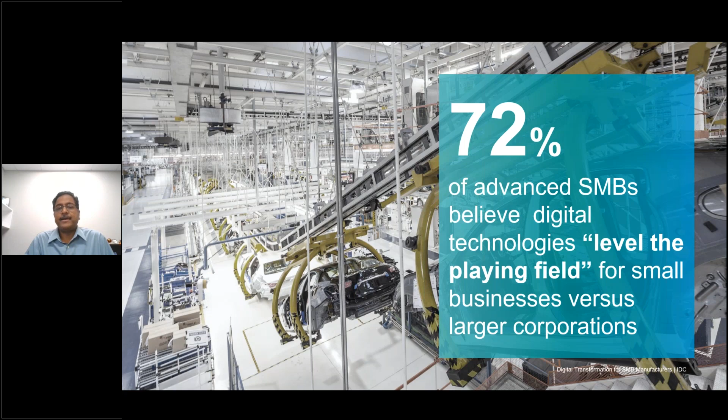But what does digital transformation really mean for small and mid-sized businesses, which the Saratech team addresses in a key manner? Industry analyst IDC recently did a survey where the focus was SMB manufacturing and digital transformation in particular. They surveyed hundreds of SMBs around the world, asking them about digital transformation, their strategies, plans, and recent progress. Importantly, 72% of advanced SMBs surveyed believe that digital transformation helps level the playing field for small businesses versus their larger competitors. So clearly, digital transformation is a key part of the go-forward strategy for many SMBs.

Second, the survey asked about technology priorities. Cloud computing and software as a service, or SaaS as it's called, really stood out. Nearly a third of SMB manufacturers surveyed said they were prioritizing cloud computing or software as a service solutions. And nearly half said that these categories would be a technology priority in the next 12 months. IDC notes that the cloud is a great enabler for collaboration and analytics. I think that's a great way to put it, because it's not about the cloud itself, but what you gain from it, and collaboration is the key.

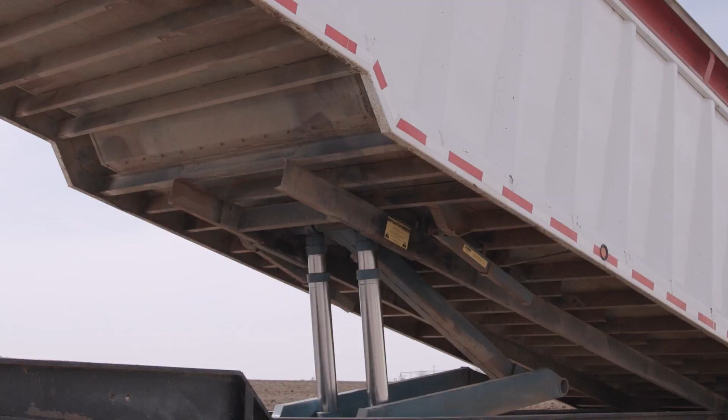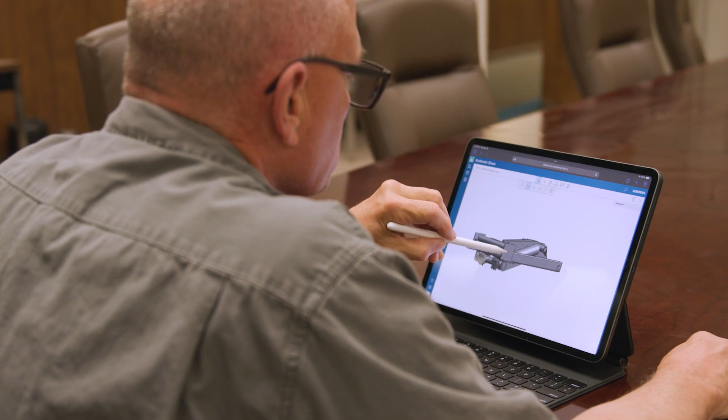Let's take a look at their journey. Harsh International is a manufacturing company in northern Colorado. We manufacture everything from livestock equipment to hydraulic truck equipment. Bob came to me with the idea to create a larger hoist, but one that doesn't have the cylinders swinging underneath the truck. With Xcelerator Share, we could click on it, send it to Bob. It didn't matter if it was over the weekend or he might have been in the office next door looking at it. Those guys would be able to pull it up on their computer and just take a look at everything and say, this part could be a little bit different. And I was able to just bounce back those ideas really fast between all of us.

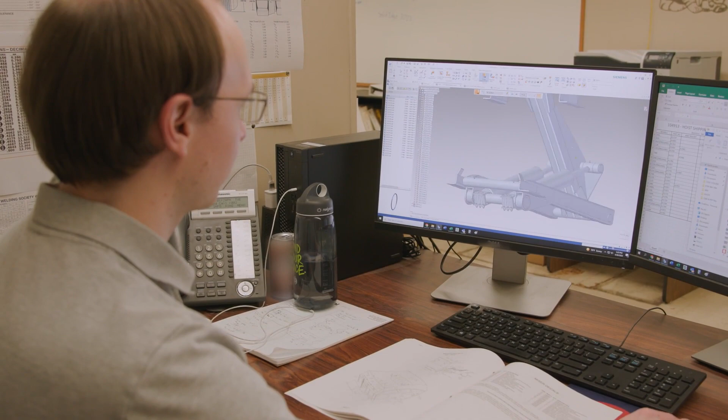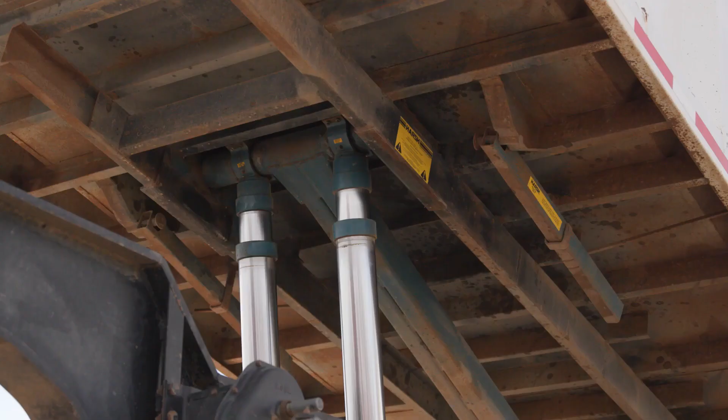The need for people to be in the same room is not near as important as it was before. Now it's on a computer screen. Everybody knows exactly what needs to be done. As soon as they complete it, you see the result right there on the drawing, the 3D solid model I'm looking at. The time you spend addressing that issue is dramatically reduced. Being able to take that hoist from conception to fruition and then on to production in something in the range of 3 to 4 months was awesome. Hitting that market as fast as you can means taking advantage of that market as quickly as you can. That's what Share has done for us.

That was a great explanation of what customers are doing with Xcelerator Share.

We love helping companies like Harsh succeed with their digital transformation, and Siemens is committed to that mission. The investment Siemens has made over the last several years has just been phenomenal. You can see on the slide here, there's a list of companies that we bought into the digital industry software portfolio. We've literally invested more than 10 billion euros over the last several years, and we've become one of the largest and most successful software companies in the world. Not just an engineering company, but one of the most successful software companies. In fact, Siemens ranks among the top 10 largest software companies in the world. So really, we are committed to providing you the best software solutions and engineering solutions in the world.

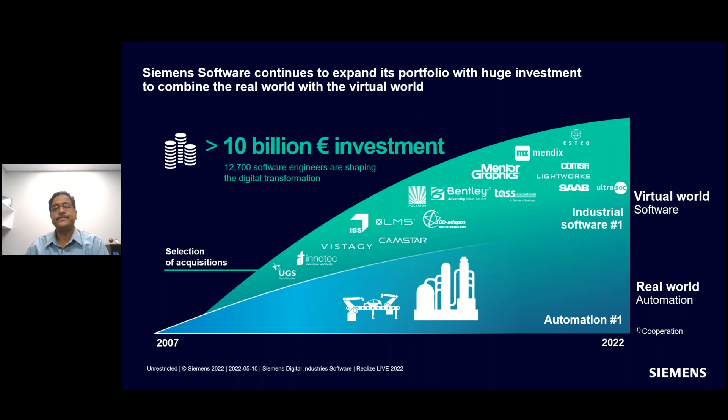The result of all this investment is Xcelerator. It's a catalyst for the digital enterprise. Xcelerator is our comprehensive, integrated portfolio of software, services, and an application development platform. This portfolio accelerates the transformation of businesses into digital enterprises and unlocks powerful industrial network effects.

As a key part of the Siemens Xcelerator portfolio, you can think of Solid Edge as your on-ramp to digital transformation. Focused on the requirements of small and mid-sized manufacturers, Solid Edge enables manufacturers to create a comprehensive digital twin of their products, with solutions for mechanical design, electrical design, simulation, manufacturing, and publications. It also includes solutions for data management for all the technical data created and consumed when building this digital twin. It facilitates collaboration both within manufacturing companies and with external resources, including suppliers and customers. So Solid Edge is your on-ramp to digital transformation.

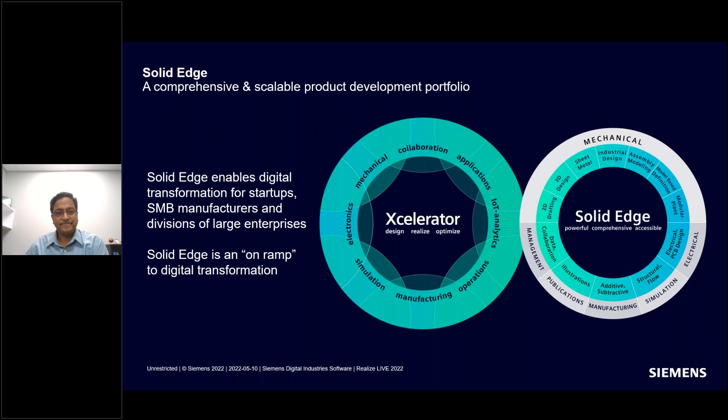And guess what? Solid Edge assists in digital transformation for companies of all sizes. Here you see an image from Chantiers de l'Atlantique. They're designers and manufacturers of some of the largest cruise ships in the world. To them, communication and collaboration turn complex design concepts into competitive advantage for building the largest cruise ships in the world.

Now it's time to share some of the great functionality we have with Solid Edge 2023. Let's create, connect, and collaborate.

Our featured customer for this year's release is Yanu. Yanu is an Estonia-based company founded in 2019, and the images you're looking at are fully autonomous bartending robots leveraging AI technology. It serves drinks, handles payments, identifies and communicates with clients—contactless, hygienic, and highly efficient bartenders, you could say.

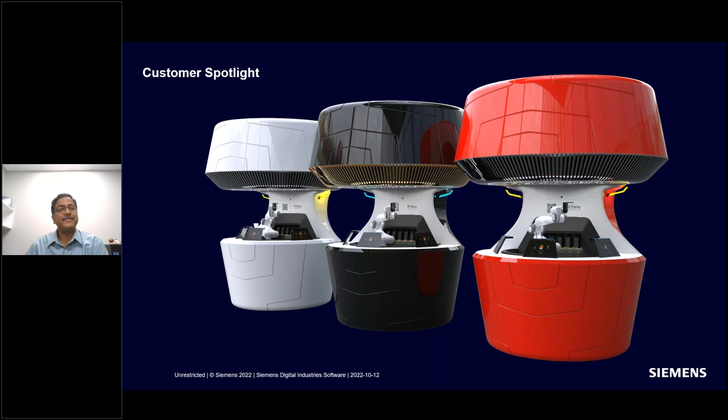With the release of 2023, we continue to push the boundaries of product development, leveraging the comprehensive digital twin, with exciting new capabilities such as simplified modeling workflows, value-based licensing, Solid Edge SaaS, improved interoperability, Solid Edge Inspector, Kanban boards, and literally hundreds more. I'd say Solid Edge is one of our best releases yet.

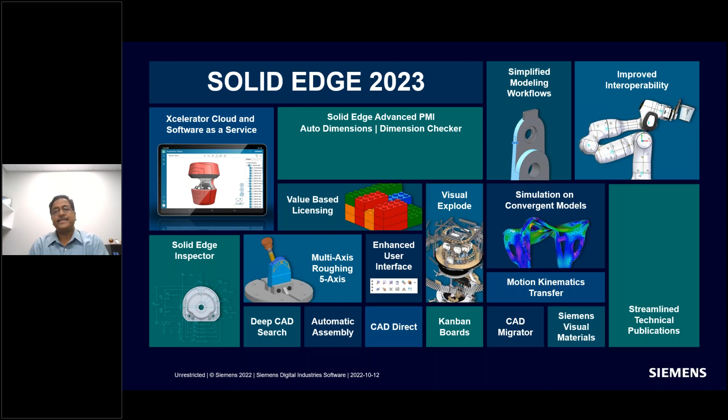Customers who got a chance to preview Solid Edge 2023 have some comments about it. Francisco at Fiorini was really impressed by our focus on daily workflows, and Zohar is excited about being able to work easier and faster. I hope that is available to all of you on this call.

Solid Edge SaaS includes next-generation cloud-based technologies, specifically designed to help our customers collaborate with colleagues, partners, and customers in a secure environment. And there are many other benefits that come with Solid Edge SaaS. Let's break it down.

First of all, Solid Edge will always be the heart of your product development process with its powerful CAD and manufacturing preparation capabilities. But there's a new way to consume Solid Edge called SaaS, or Software as a Service. It includes all the things you love about Solid Edge, but so much more.

First, data management and security—the ability to have your data securely stored in the cloud and share it with others. Augmented reality—the ability to look at your product in the context of the real world. Collaboration—everybody working from a single source of truth, and they can share that data. And when they can share that data, they can effectively communicate. Mobility—anywhere, anytime, any device access to your data. And finally, value-based licensing—get the features you need when you need them.

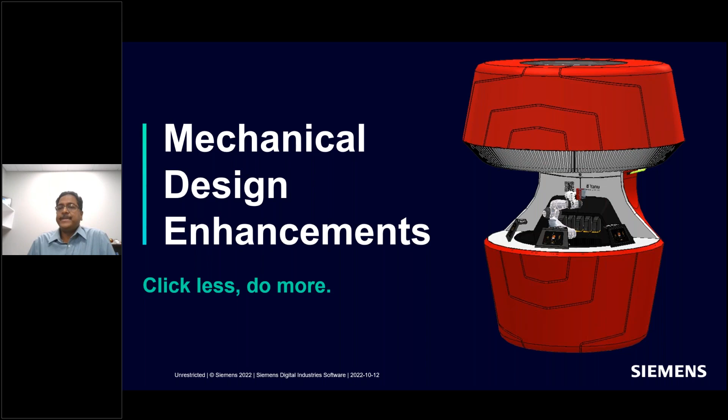Right in the core of your daily work, you're going to find some great productivity improvements. We've used great lessons learned with synchronous technology and brought those into the ordered and history-based modeling workflows. We revamped the Solid Edge user experience and put the tools right at your fingertips. Let's take a look.

Solid Edge 2023 delivers enhanced workflows, promoting greater performance and increased productivity. All commands and environments have been refreshed and now provide an easier to use, modern, clean look and feel. But still, the Solid Edge you know and love remains at the core.

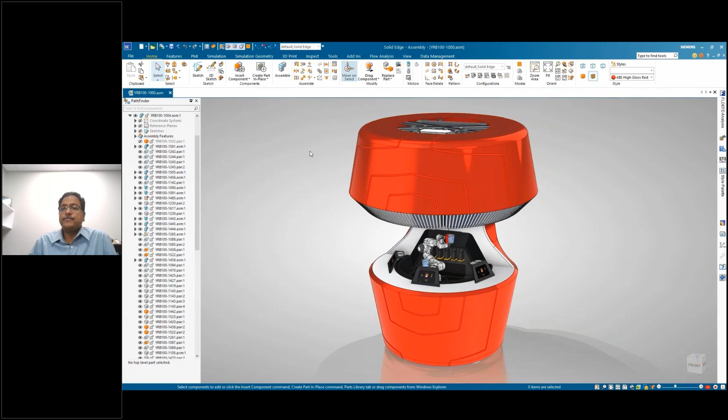Following the introduction of the context toolbar in Solid Edge 2022, we have now expanded the capabilities into the part, sheet metal, and assembly environments, providing high-frequency object-specific commands at the tip of the user's cursor, improving productivity. Focusing on the RoboArm, we'll complete the design of a new glass holder.

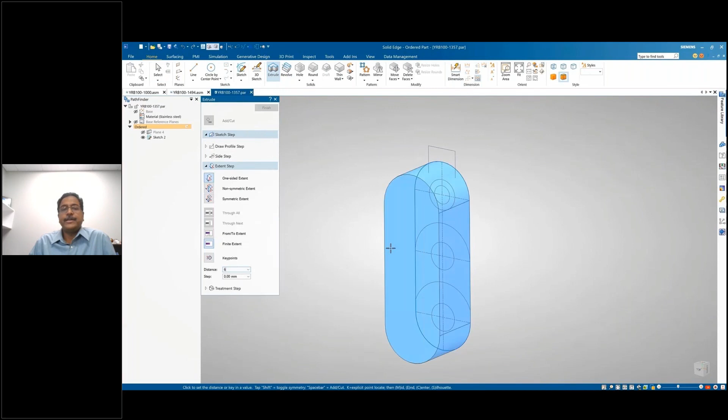The material addition and removal workflows have now been combined into a single command. Also new is the introduction of automatic regions in ordered sketching. This speeds the process of sketching, as it eliminates the need to trim sketch elements and project face edges.

Closed areas are simply found automatically, and as can be seen here, as we add and remove material with a single extrude command. Notice too the use of the context toolbar, meaning that all these commands are at your fingertips.

Changing an extruded feature to a cut couldn't be any simpler - just edit the feature and change the options. When adding features, the spacebar can be used as a quick toggle to switch between add and remove.

Solid Edge 2023 also speeds up the process of direct editing in an ordered model by introducing synchronous capabilities in the move, rotate, and offset face commands.

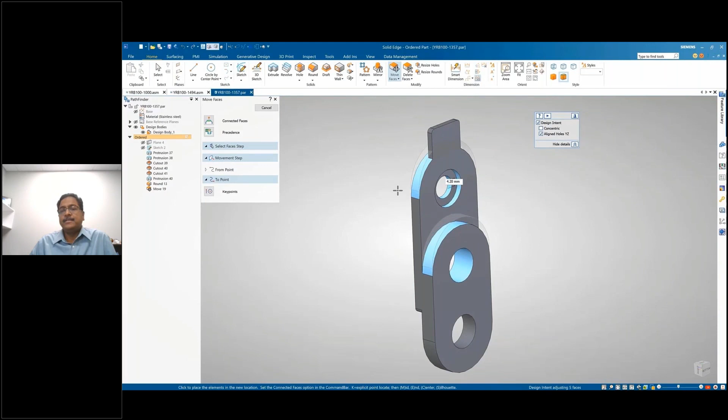Here, the steering wheel is used to easily define the move and rotate directions, and design intent rules can be used to control the movement of other faces in the model. Here we can see this as we adjust these two cylindrical faces and toggle the concentric options on and off.

One final alteration on this part is to add an angle to the side faces by using the rotate command. The enhanced workflow makes this a breeze. Since this is an ordered model, the move and rotate features are captured in the Pathfinder and can be edited later.

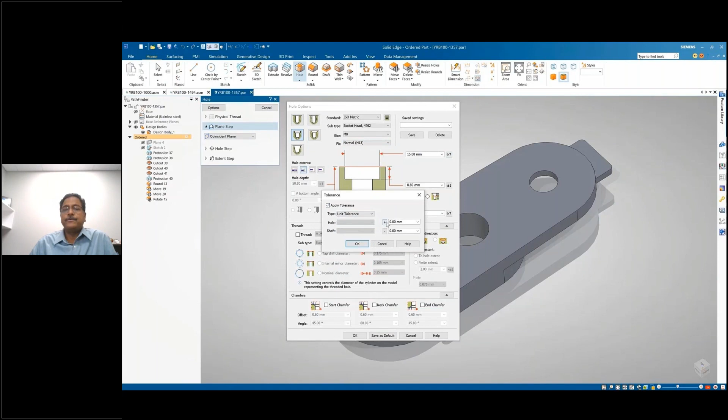The hole feature capabilities have also been expanded and now have support for standard fit class tolerances for hole, countersink, and counterbore type holes. These conform to ANSI, ISO, and DIN standards, and support for unit tolerance has also been included.

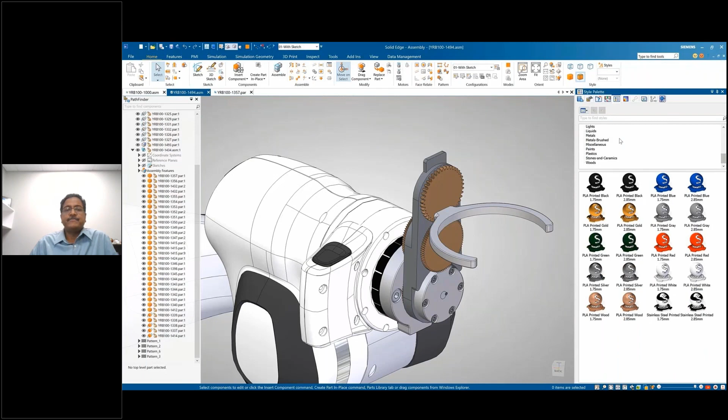Solid Edge 2023 also introduces a new library of high-quality face styles, which consist of many common categories containing thousands of different styles, ranging from additive manufacturing, coatings, fabrics, plastics, metals, and many more. They can simply be dragged and dropped onto the desired parts to easily add realism to any design.

There have also been several improvements to assembly features with the addition of new commands such as subtract, slot, union, and swept cutout. In this case, we'll add a swept cutout to document a routed path through two wooden plinths at the top of the design. The workflow is the same as it is in the part environment, but with the additional step of choosing the parts to cut.

Finally, there are new workflows to explore and visualize internal components of any design with the new visual explode command - definitely one of my favorite things in Solid Edge 2023.

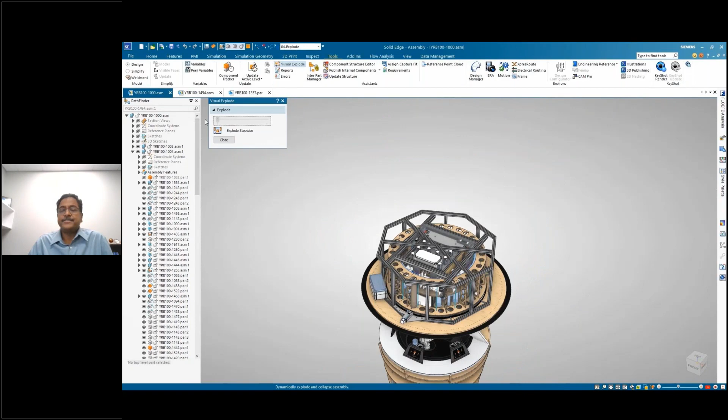Simply drag the slider bar to dynamically explode the parts on screen, then drag it back to collapse the parts back into place. There is also a stepwise option which intelligently explodes the subassemblies in sequence and provides additional ways to visualize the design.

Solid Edge 2023 continues to keep Solid Edge at the forefront of 3D CAD and stay ahead of the curve, thanks to increased core CAD performance, new and improved workflows promoting productivity gains, and the continuous implementation of user-requested features and functions.

It's exciting to see some of the great new technology from Synchronous has been moved into the ordered or history-based environment, increasing productivity while speeding onboarding for first-time users.

Regions are just a huge productivity saver, as is the ability to just drag and drop and define add versus cut feature interactions. And finally, having true synchronous style edits in the ordered modeling workflow is just a game changer.

Now, ordered direct modeling commands such as move and rotate make use of the signature synchronous steering wheel to drastically improve the ability to edit ordered models.

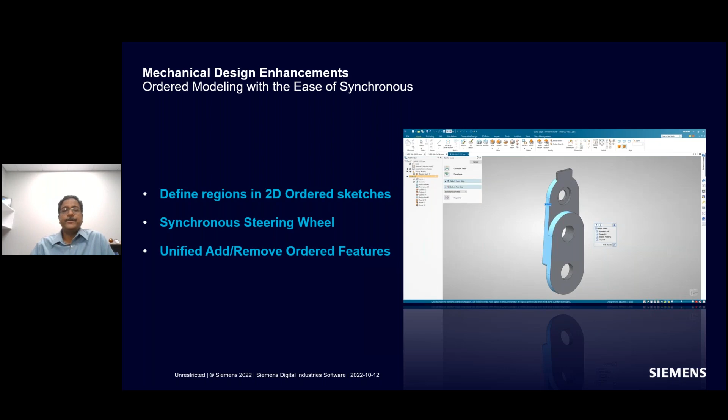Here we have some positive feedback from our customer, Jan Boss at Geha.

Continuing in mechanical design, in addition to bringing some of the great technology of Synchronous into Ordered, we've also revamped the user interface to be fresher and more productive. A clean, modern presentation of a command's options allows users to discover the capabilities of each command more intuitively and quickly. Similar to the presentation styles of many other CAD solutions, the vertical command bar allows users to adopt Solid Edge more quickly, leading to faster onboarding for new users, increased satisfaction, and lower cost of training.

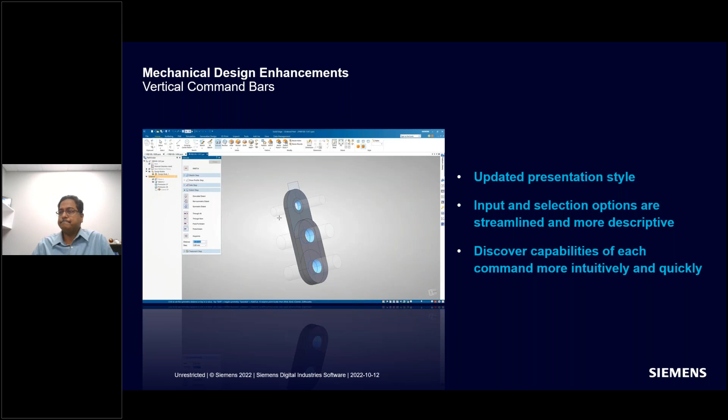We've also brought the new commands closer to the action. The context toolbar pops up the highest frequency object-specific commands right to the user's cursor. With command options available right at the point of focus, mouse travel is minimized, improving productivity and streamlining the user experience.

Here, one of our longtime users, Mirko Markovic from Kaser, immediately saw the value of the new UI, noting that they can work more intuitively and efficiently.

And like I said, Visual Explode, it's just amazing. I love the staged mode where it does sub-assemblies first and then explodes down to the levels. It's great stuff. You should give it a shot.

We also continue to build out our automated assembly tools by allowing users to capture common relationships and quickly replay them in new assemblies, as well as many other daily workflow and productivity enhancements.

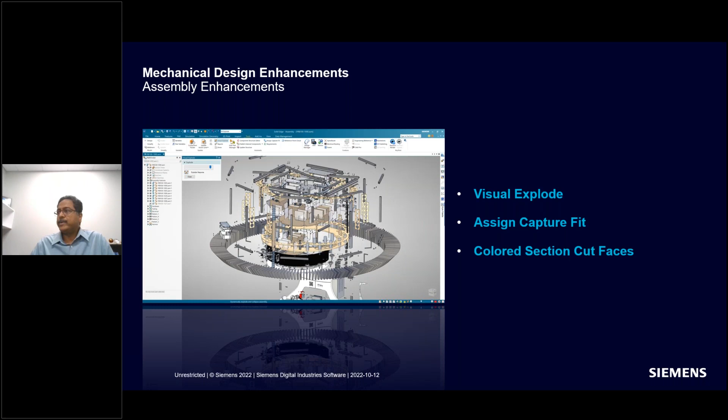Again, more positive feedback from Jan at Geha, and he's really excited about the new assign capture fit functionality in Solid Edge.

We showed you the new capabilities to apply visual styles and materials in Solid Edge. This has been a collaboration across various parts of Siemens to deliver not only very useful, but consistent styles across the products. And it's as simple as dragging and dropping them onto your model.

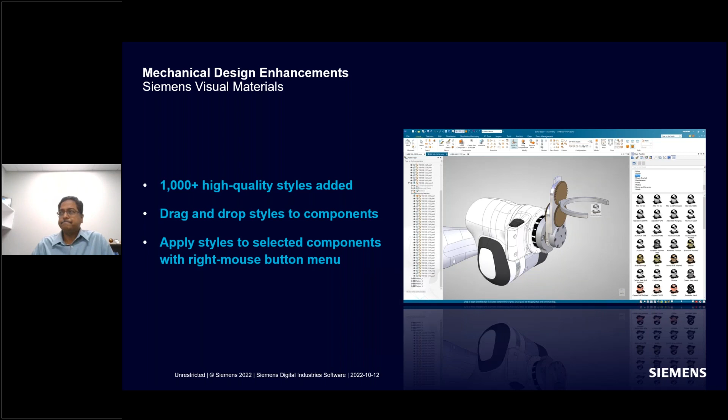Next, let's look at some interoperability enhancements. The new interoperability enhancements unlock the power of your design data while future-proofing your work. Transfer Solid Edge data to and from the Xcelerator portfolio of products, including NX and Process Simulate, easily and accurately.

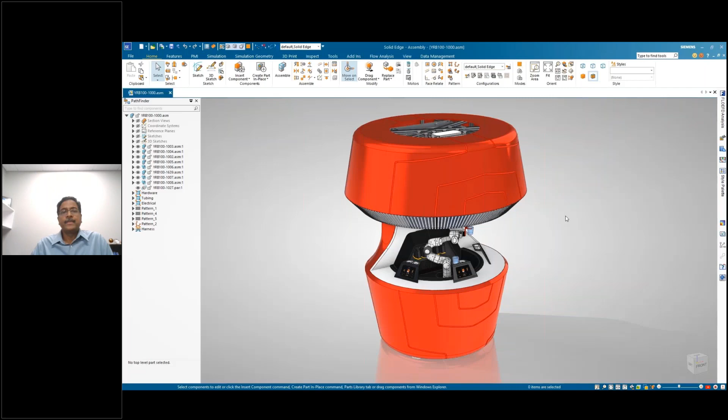Solid Edge 2023 is now even more tightly integrated with other downstream processes and can now transfer assembly kinematic information to applications such as NX and Process Simulate in order to perform further dynamic studies or operations. In this example, you'll see how we can save time and minimize errors by transferring the motion kinematics of this robot arm from Solid Edge to Siemens Process Simulate.

Starting in the Solid Edge motion environment, we'll make sure the kinematics are properly defined by selecting all the parts and then choosing which ones are moving or fixed. This creates the 7 needed joints to replicate the 7-axis Panda robot. Once this is done, the motion of the robot can be verified by running a basic simulation.

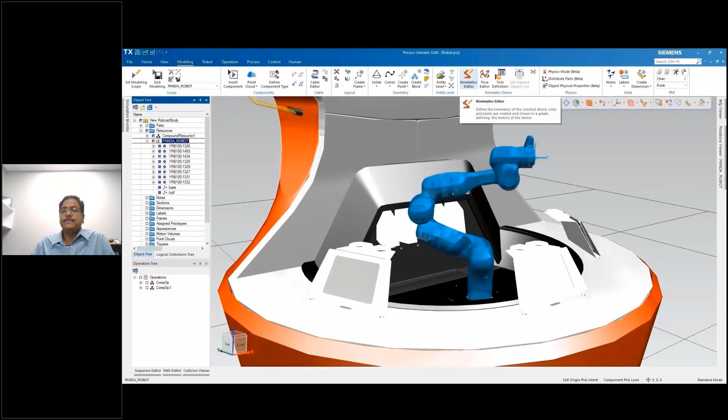Once the Solid Edge model is ready, it can be exported complete with all appropriate kinematic information and subsequently opened in Process Simulate. Once in Process Simulate, we can see that by using the joint jog option, all the relevant kinematics are present without having to do any additional manual prep work.

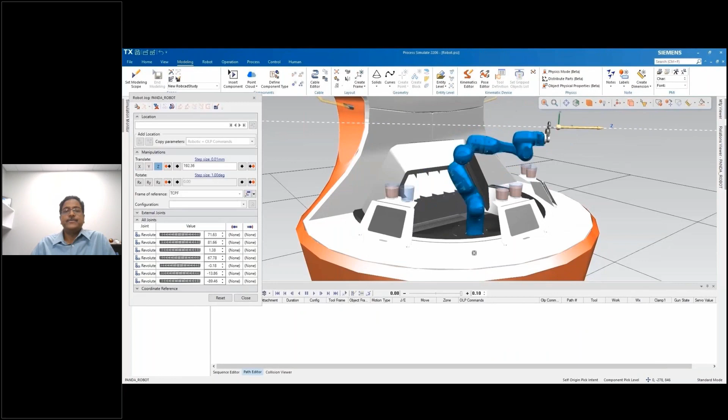The kinematic information of all joints can be viewed by setting the model scope and using the kinematic editor. Here, kinematic relations are used to define the model and simulate the reach movement. You can also see that all the joints are correctly connected with each other in the sequence that was defined in Solid Edge. The movement can then be defined in the tool center point frame using inverse kinematic movements, which are calculated automatically.

Finally, we can simulate the action of the robot and see the exact movement needed to make our drink of choice. Solid Edge 2023 increases productivity by providing even closer interoperability and integration with other Siemens portfolio products, such as Process Simulate and NX Mechatronics Concept Designer.

So obviously, we've done a lot of technical work here to enable exchanging important design information like joints, couplers, lengths, and rigid bodies into other applications. The real benefit for you is what it enables, and that is broader access to the Siemens Xcelerator portfolio—for example, for process verification using Tecnomatix Process Simulate, or for true virtual commissioning with NX Mechatronics Concept Designer. This seamless integration provides a whole new world of possibilities via Accelerator.

But we didn't stop with joints and kinematics. Material and physical properties assigned in Solid Edge are now seamlessly translated to NX. Again, this opens a huge range of Accelerator options by providing consistent data for CAE or inspection applications. Enhanced PMI transfer capabilities include section and model views and the ability to associate sketch and section view dimensions to a design body. This enhances interoperability with NX CAM, NX CMM, and other validation tools downstream.

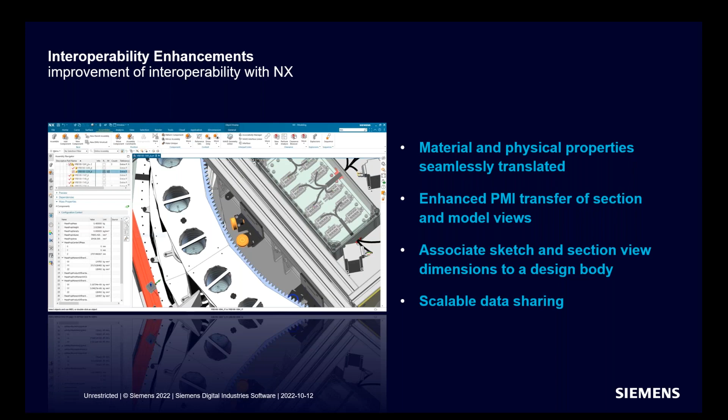And we continue to build out CAD Direct. In addition to NX parts, you can now insert SolidWorks, JT, STEP, and Parasolid files, both part and assemblies, into Solid Edge assembly directly without the need for files created by translation. CAD Direct makes working and collaborating with partners, suppliers, and even other departments of your company easier than before by

supporting multiple file types without the need for everyone to use the same modeling system. A great feature for this is that the solid bodies and surfaces can be inserted in the form of internal components. This means you don't have to keep track of any other files because all the parts are contained directly in the assembly. A great way to manage supplier data, for sure.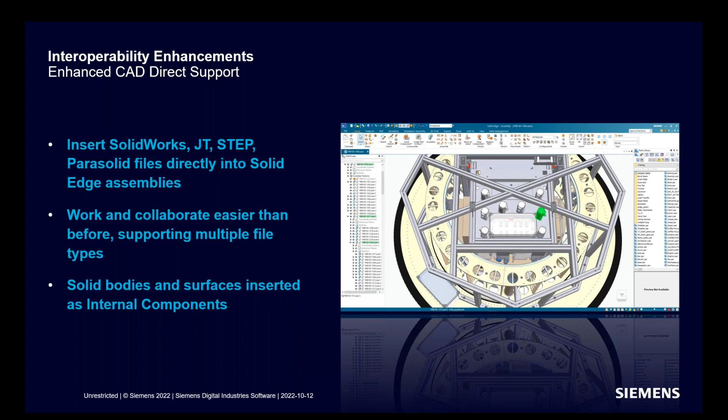Next, we'll jump to model-based definition, where we leverage design and manufacturing intent seamlessly. Model-based definition enhancements give you the tools to capture design and manufacturing intent faster and easier than ever before. Solid Edge Advanced PMI delivers high-quality, consistent dimensioning for downstream PMI applications. Let's take a look.

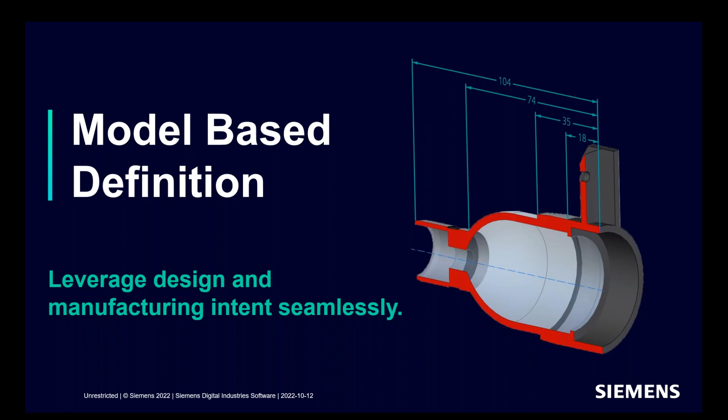Solid Edge 2023 provides new advanced PMI and model-based definition capabilities, allowing users to detail 3D models faster and easier than ever before, and to seamlessly share 3D model intelligence for downstream manufacturing processes and other relevant stakeholders. With new Solid Edge PMI Advanced, this is the capability to automatically arrange dimensions on a 3D model with a couple of clicks.

Simply select the dimensions and arrange them stacked or chained. If the dimensions need to be arranged with respect to a smaller area of the model, there is an arrange to area option, which makes this task very easy.

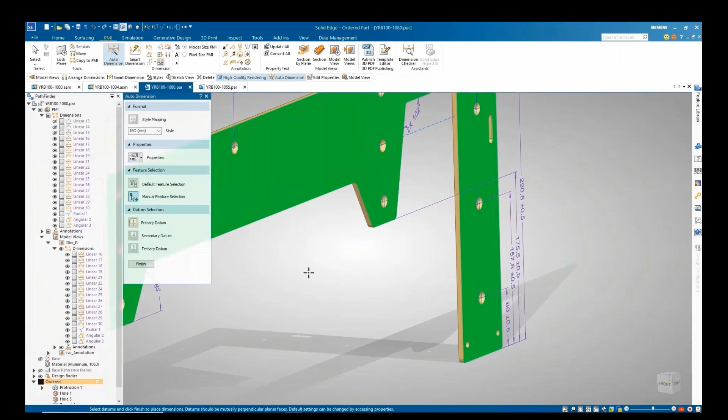This part lacks the necessary dimensions for the size and location of some of the holes. The new auto dimension capability takes care of this with ease. All we need to do is select the primary, secondary, and tertiary datum planes, select the features to be auto dimensioned, or even just auto dimension the whole model.

With support for faces, cylinders, and holes, it's never been easier to save time in dimensioning your model. We can even define tolerances to be automatically added to each dimension.

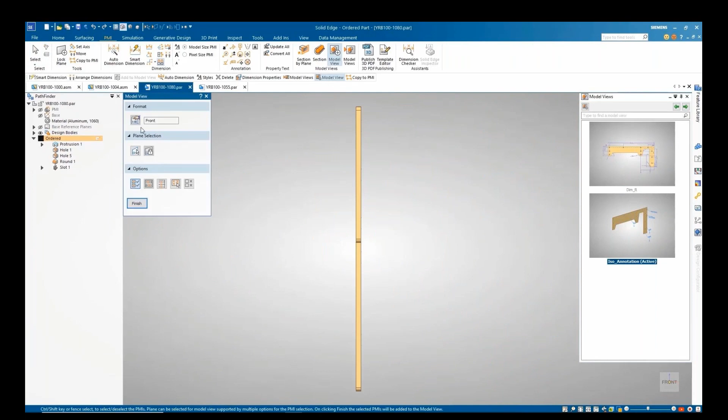The new model view palette allows for fast interaction with model views and displays easy to understand thumbnail images, which are directly derived from the model views themselves. Model views can be navigated by clicking on the images or using the arrow keys. It's also easy to create new views directly from the palette.

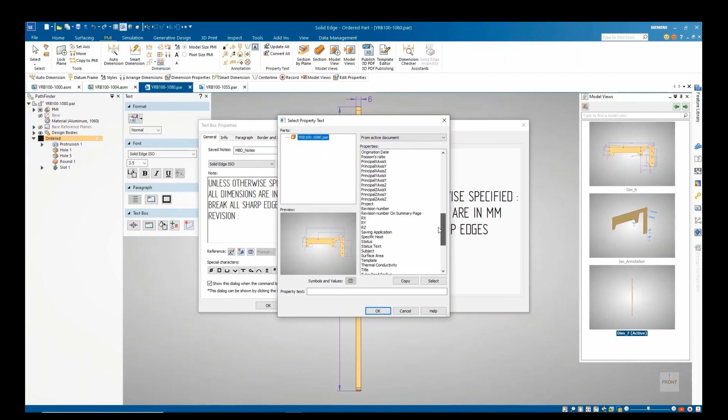We can more easily add notes to the model views, and these notes can include model properties like the latest revision of the part in this example. There's also an option to keep the text parallel to the screen.

The creation of drawings is a breeze through the new model view palette. A right mouse click and selecting the template is all it takes to create a drawing. The same model view palette can also be used in the draft environment, where we use it to bring in the front view and use the alignment function to ensure it's in the right place.

The fit class and tolerance of holes can now be easily retrieved in callouts. Also, the ability to modify the color of cut faces on section views means it is easier to differentiate internal details of a model and communicate necessary product manufacturing information.

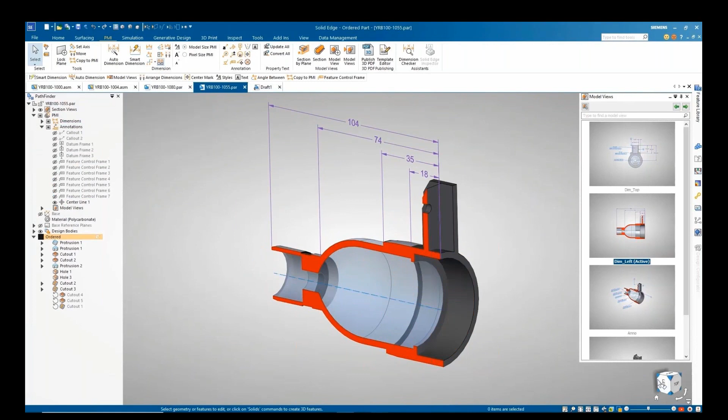The centerline annotation, now supported for appropriate geometry types, gives users a quicker way to add the desired PMI information to their models. And section view dimensions and sketches are now associated to the design body, making it easier to use them in downstream processes.

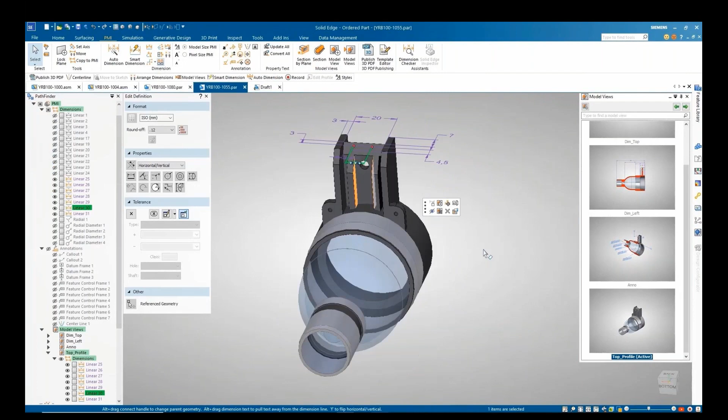The copy to PMI workflow has also been improved. Now, when copying selected 2D annotations and dimensions from a profile-based feature or sketch, once they become 3D dimensions, they are automatically connected to the corresponding model faces. Selecting the PMI will highlight the associated faces, as you can see here.

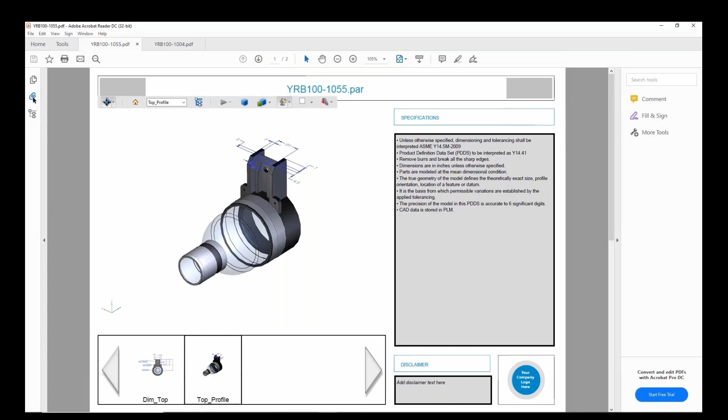Solid Edge model-based definition allows designers to publish all this product information for use in downstream processes. This process is simple and easy, and the publish process creates a high-quality 3D PDF, which contains all the chosen model views and supports full view manipulation. Assembly documents can also contain a fully interactive bill of materials and so much more.

In summary, Solid Edge 2023 advanced PMI and model-based definition capabilities provide new, streamlined tools to detail 3D models easier than ever before, and to seamlessly share 3D model intelligence for downstream manufacturing processes and to other relevant stakeholders. I think it's truly important how we are moving the intelligence out of the drawing and directly into the model. Not only that, though, we are providing new levels of automation.

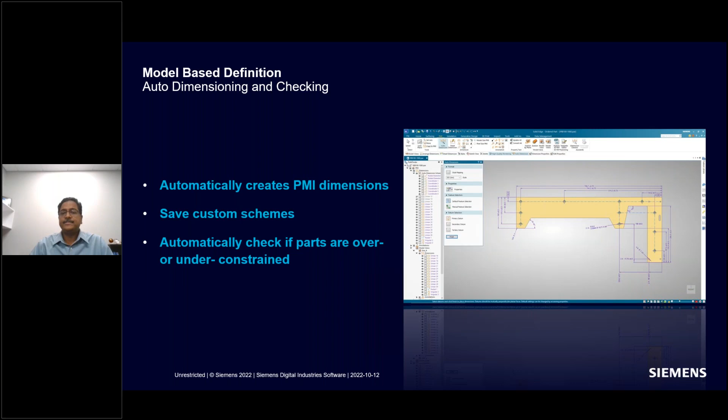The new auto dimension command increases productivity by automatically creating PMI dimensions for your part and sheet metal components. Plus, users can save custom schemes with tolerances and hole callout strings to standardize the dimensioning process. Dimension checker assistants will automatically check part models to determine if the part is over or under constrained. Dimension checker's color-coded results are displayed both in the graphical area and in an interactive report, highlighting constraint levels to identify missing tolerances.

The model view palette that I just talked about is one of my favorite enhancements in 2023. It makes it so easy to manage which dimensions are in which views, and you can visually see how things are organized. Yet, if you still want to create drawings, they can be created very quickly and directly from the model view palette, just a few clicks or simply by dragging and dropping the model views into them.

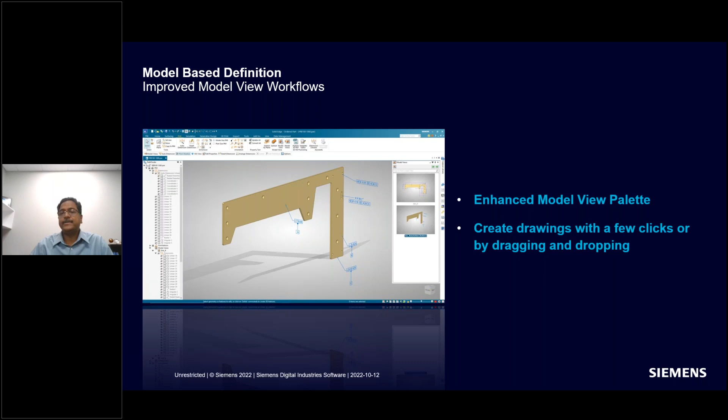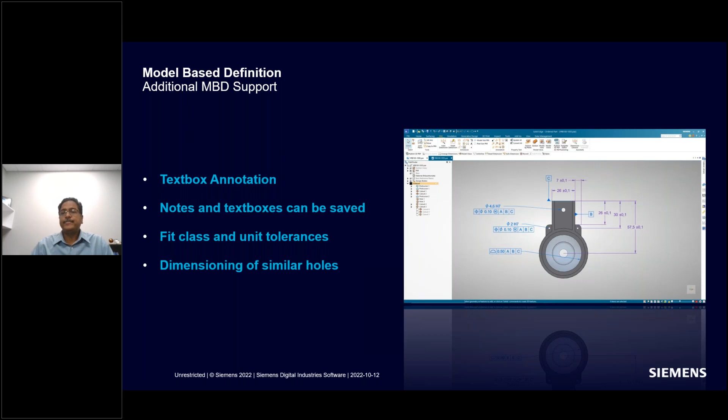We've really built out the number of things you can do in annotating your 3D model as well. Text box annotation enables the addition of notes and other information to 3D PMI. Notes and text boxes can be saved to a notes library, saving significant time when adding frequently used notes to 3D PMI or to the drawing. The annotations can also be set to always show parallel to the screen as the model view is rotated.

Next, let's look at a new capability being introduced to the Solid Edge portfolio called Solid Edge Inspector. Solid Edge Inspector really lets you save time and money by eliminating errors in inspection. It automatically creates quality inspection data and reports that users can trust while enabling seamless communication in the downstream manufacturing process.

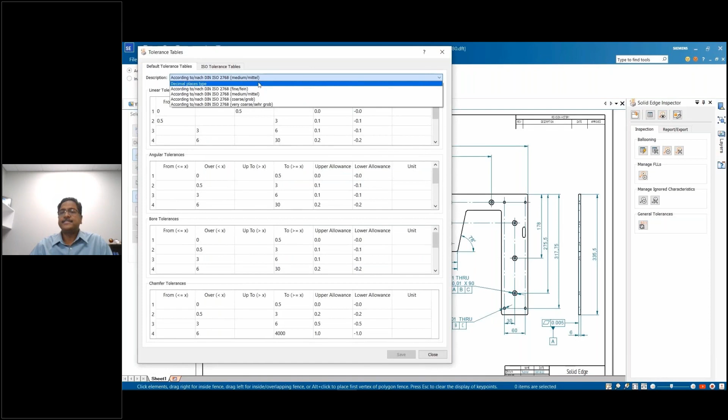Quality inspection is an important competitive factor. Using Solid Edge Inspector makes inspection planning a quick and easy process. Looking at this side plate in the Yanu AI robotic bartender will open the drawing that already has all the relevant manufacturing information defined. Launching Solid Edge Inspector, we can set the tolerance standards required. If needed, multiple tolerance tables can be configured, which can later be applied based on part types.

There is also the flexibility to create characteristic numbers using balloons in a quick and easy process. Based on the standards and configurations which have been set here, the default tolerances get applied to the dimensions which don't have specific tolerances defined. These dimensions are highlighted in yellow in the characteristic table.

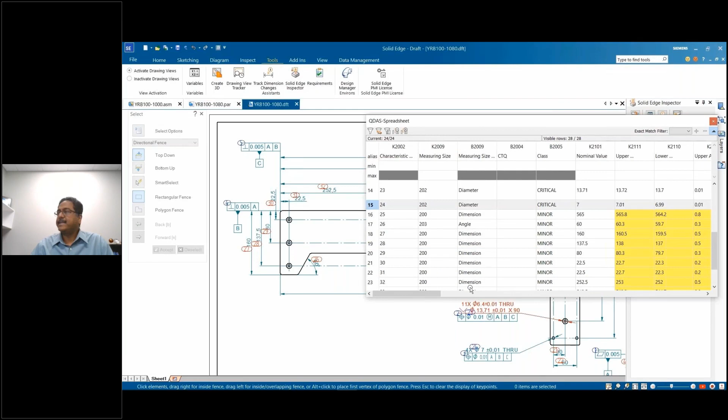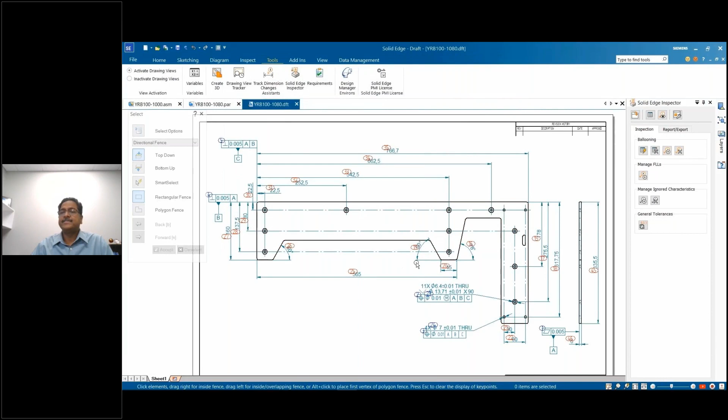At any time, the dimension class can be controlled to define how critical they are. The inspection balloons can be shown or hidden when required. This inspection information can be exported into multiple file formats, which can later be used in downstream applications. It's also possible to export this information as a separate project file, which can be re-imported into the drawings later. This is very useful in situations where the quality team doesn't have access to the CAD files.

It's also possible to generate inspection reports by choosing a template. These templates can be easily configured for any industry standard. The inspection data can also be easily updated to accommodate any design changes.

Here, a change is made to the model and the drawing is then subsequently updated. Currently, we also delete a dimension and add a new dimension. Then a click of a button updates the inspection data. This will add a balloon to the new dimension and update the characteristic number list with this and all the other changes that were made. The changes, like modified dimensions, new and deleted dimensions, are captured as part of the characteristic number list.

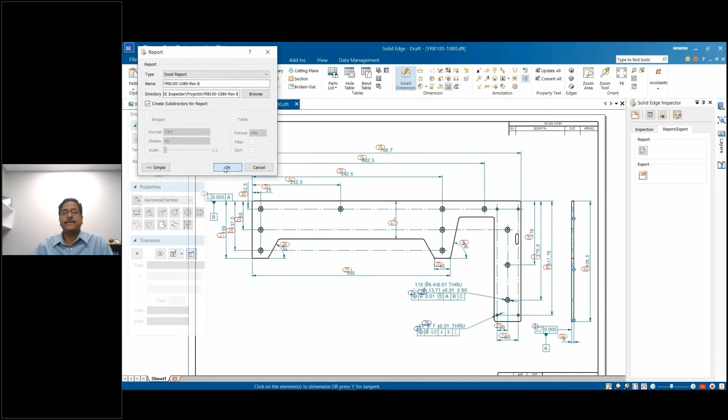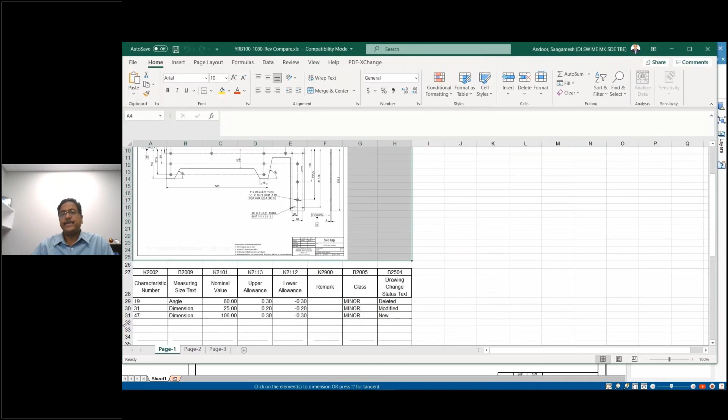Filters can be applied to these columns similar to Excel. As the design has been modified and the drawing updated, we'll regenerate the inspection report and see the updates. The list shows new, modified, and deleted dimensions. Filters can also be applied to the CN list in order to generate a compare report. This shows only the changes that were made when compared to the previous revision.

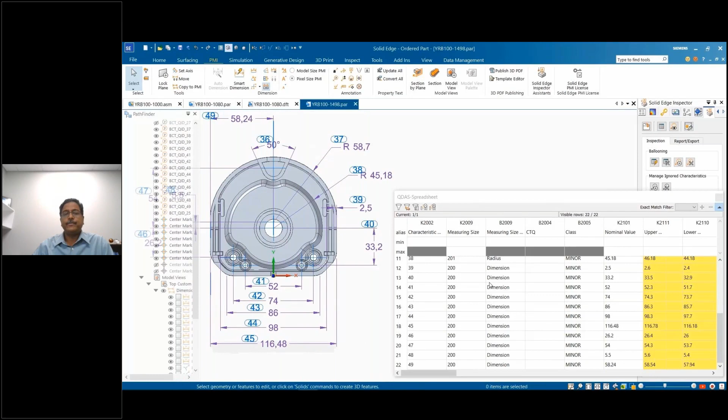Solid Edge Inspector also fully supports a model-based inspection process. This means it works seamlessly on the 3D model in an MBD workflow. Just like we saw for the 2D drawing, it is possible to create and edit balloons and generate a report on a 3D model using the PMI dimensions and annotations. Solid Edge Inspector provides a competitive edge by streamlining the quality and inspection process.

Right, and I think this is going to be a big time saver for a lot of Solid Edge customers. As you saw, Solid Edge Inspector automatically identifies, labels, and extracts critical design characteristics from a 3D model and drawings. Unique identifiers are assigned that are linked to this design information over the entire life cycle of the part through all changes, modifications, and iterations.

Solid Edge Inspector saves users valuable time by automatically identifying and labeling the most important information in up to 80% less time than manual entry methods. Plus, for increased downstream consumption and better communication with colleagues, the data can be extracted into different neutral formats, including Microsoft Excel.

First article inspection reports can be automatically generated and are essential to effective inspection planning. They can assist in locating errors that could otherwise cause issues later in the project's life cycle, saving time and money by catching errors before the product proceeds downstream in the manufacturing process.

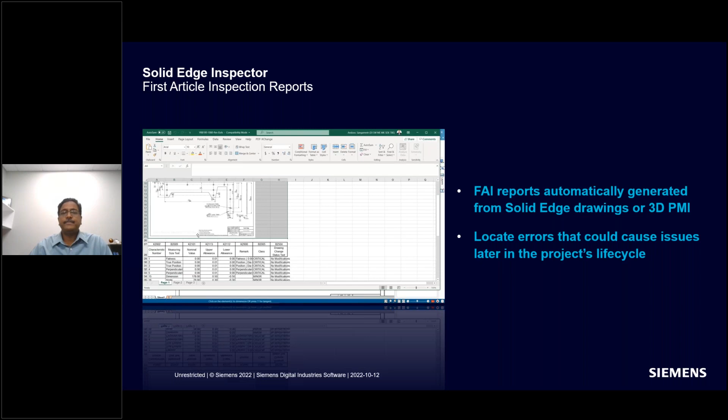Next, let's take a look at some of the simulation enhancements in this release. First, make the most of your mesh. Enhanced capabilities now allow simulation on convergent models. Expansion of body mesh functionality to include assembly and sheet metal simulation reduces meshing errors and accelerates the speed of simulation studies. Let's take a look.

Solid Edge 2023 continues to accelerate the design process by providing powerful tools to help digitally validate designs and build better products in less time by front-loading the simulation process.

Starting with a generative design study, this will help optimize the weight and material usage for the caster wheel component. After creating a new study and defining the loads and constraints, new for Solid Edge 2023 is the ability to define the maximum displacement for a point on a given face. This helps guarantee the model has the appropriate amount of stiffness in a given direction.

Also, planar symmetry is a new shape constraint that optimizes the model across 1, 2, or 3 orthogonal planes. This ensures the optimized model will result in the best possible symmetric design. Viewing the results, we can see that both sides of the model are identical due to the planar symmetry constraint. Selecting the show stress option gives immediate feedback on the areas of high stress concentration so we can adjust our model appropriately.

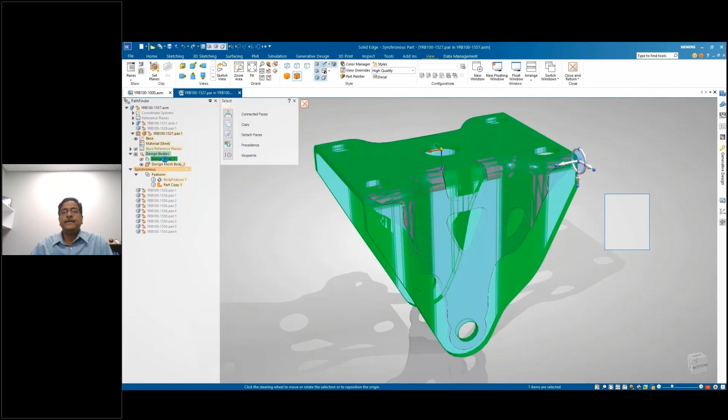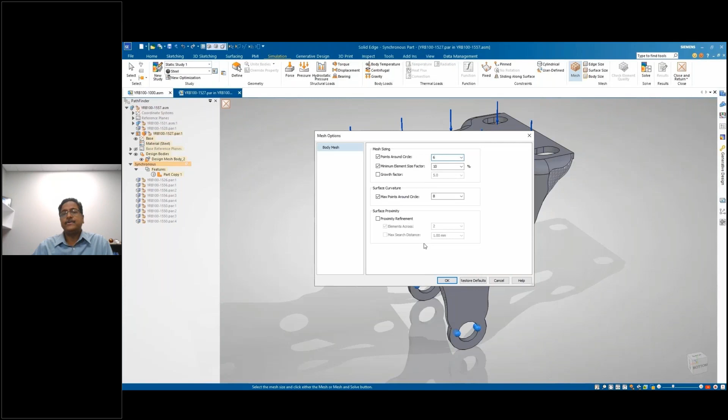The optimized generative design is a unique hybrid model that combines BREP and mesh geometries, which can be sent directly to additive manufacturing. Moving to structural simulation, Solid Edge 2023 now supports the ability to analyze these hybrid mesh and BREP models. This allows us to easily validate the results of the generative study by applying the same loads and constraints to a new study. Body mesh option, which is now available in the part, assembly, and sheet metal environments, has new options.

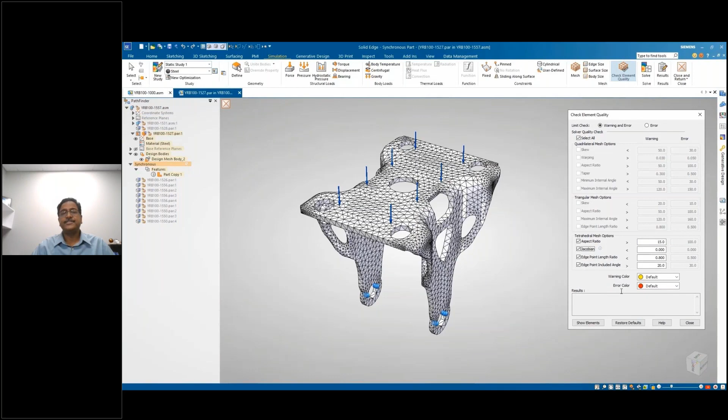These options allow the resulting mesh to be simplified and improved by defining parameters such as the number of points around a circle. In addition to providing a good quality mesh, it also provides automatic geometric cleanup of small faces and edges. After solving, we can analyze the model and see that the areas of high stress match the results we saw during the generative design study.

A new check element quality command has been added, enabling us to view and report any poor quality elements created when meshing. There are 14 Nastran quality checks available. Here we're checking the tetrahedral aspect ratio, or the ratio of the longest and shortest element edge. Selecting show elements highlights and displays the warnings and error elements in the model, as well as generating a report containing the summary of error elements.

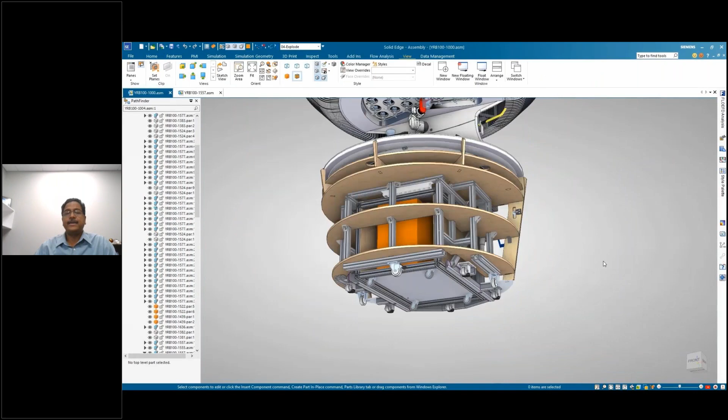A great usability enhancement for Solid Edge 2023 is the ability to reuse an existing mesh. Here we duplicate our study and bring the mesh with us. We want to test the model again, but with a higher load this time. By reusing the mesh, we are able to save valuable time, not having to remesh the same geometry. This enables us to quickly run multiple iterations of a study, ensuring the design meets all of the study requirements.

You can see Solid Edge 2023 further enhances our robust simulation capabilities, saving valuable design time and reducing material and testing costs.

Simulation is actually pretty remarkable with the hybrid mesh capabilities we've shown here. Although in theory generative models are created based on the actual part stresses, we find some customers want an extra validation pass using proven Simcenter Nastran solvers. With our unique Siemens technology, we can mesh a mesh model, so you can perform simulation studies on convergent models created using generative designs and reverse engineering, enhancing Solid Edge's capability to seamlessly incorporate mesh model geometries into the design process.

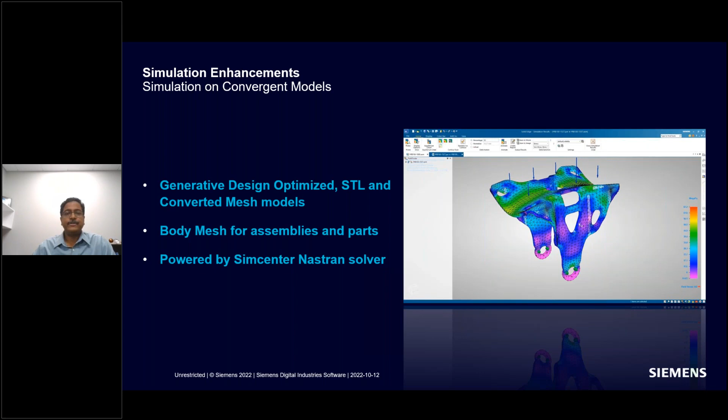The functionality of body mesh, which is truly amazing and unique to Siemens, has been extended further this release. Originally introduced in Solid Edge 2022 for parts, it has been expanded to support assembly and sheet metal simulations as well. We continue to build out the core of simulation, the stuff you do daily, so support for duplicating meshes and extensive quality checking has been added.

Generative design has received a significant upgrade as well. New generative design commands, planar symmetry, and the maximum displacement constraint give users the ability to do studies faster and more effectively than ever before.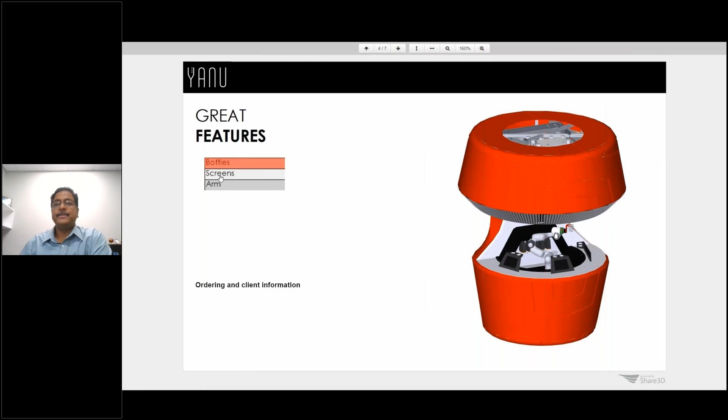Solid Edge 3D Publishing speeds your process of creating compelling and engaging technical documentation such as installation, maintenance, and instruction manuals, which are essential to business success and product performance. With a fresh and updated user interface with improved performance and a similar look and feel to Microsoft Office products, creating documents with Solid Edge technical publications is a breeze.

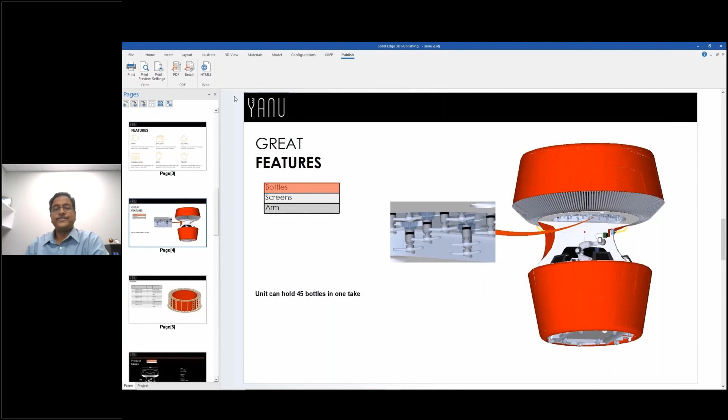The new Pages tab allows for easier navigation of documents. With a thumbnail view available for each page, users can now navigate the document by clicking a thumbnail image to go directly to that page. Also new is the ability to assign rich text to metadata and illustrations.

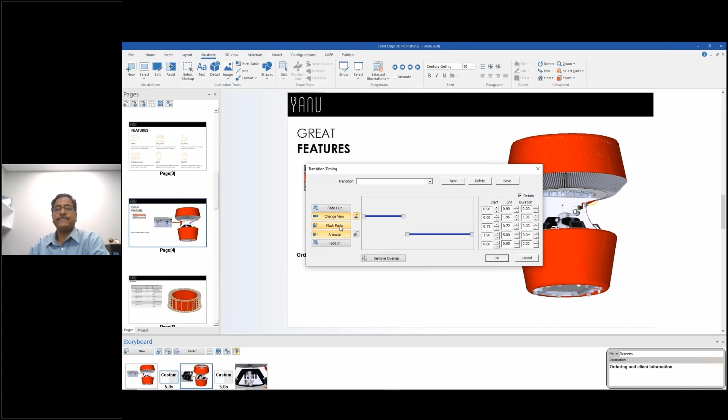Here, text styles can be fully customized to fit your needs. Animations play an important part in conveying different messages and features in documents, whether marketing or instructional. Here, a new transition editor makes it easier to create custom transitions with user-defined timing for camera movements, allowing part reveals and other animation features.

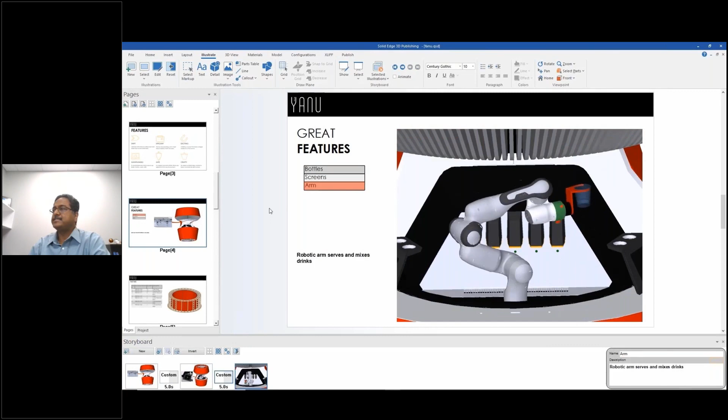Also, there are two new animation types, flash and fade. Here, a flash animation is being used to highlight the LCD screen, and then a fade animation slowly hides the screen in order to focus on the robo arm and its animation.

Also new is the ability to use simplified parts and assemblies, family of parts and family of assemblies in technical publications. For the Yanu instruction manual, we'd like to hide some of the key details on some of the parts in order to protect our intellectual property.

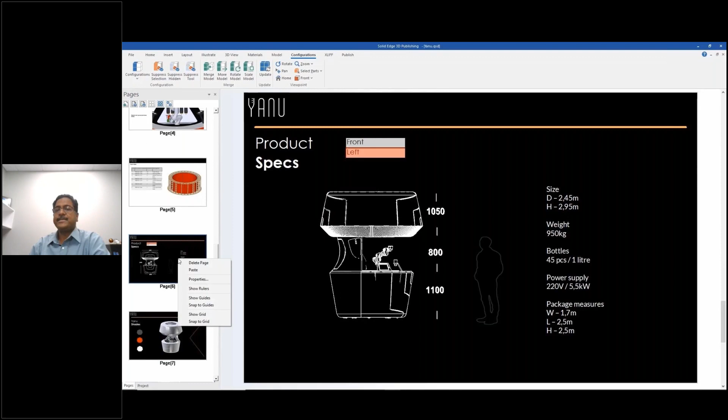To do this, we can easily replace the detailed parts with their simplified representations. This is achieved with the update command, and Solid Edge Publishing then takes care of replacing them on our model, all achieved quickly and easily without having to recreate the document from scratch.

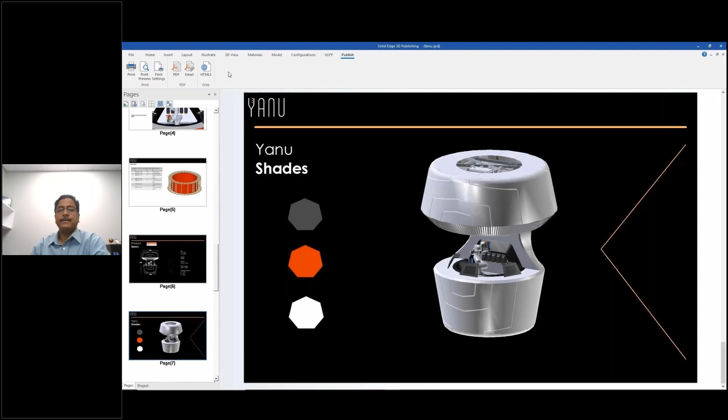With this year's release, users can now define multiple master pages to help with document creation, providing more versatility in larger documents. Shapes can also add fully actionable items in Solid Edge technical publications. Users can customize them for various purposes, such as switching illustrations, customizing views, or even directing users to web pages. In this page, use the buttons to switch between the different colors of the Yanu AI robot.

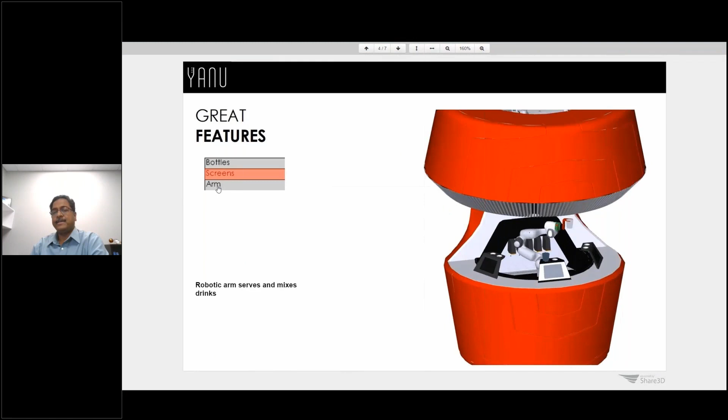Documentation can be published to all the latest industry standard file types, including 3D PDF, HTML5, raster, and vector images. Here, the completed instruction manual in HTML format is being published, and the end users can access this information without additional software by opening it in any modern browser. Really, with Solid Edge 2023's technical publications, creating technical documents and interactive manuals has never been easier.

So as you've seen, the modern user interface for technical publications makes it faster and more responsive than ever before. And there's just so many enhancements in this product, but some of our favorites: ability to flash and fade parts during storyboard animations, the leader line outlines, improved better contrast and visibility when highlighting content illustrations, and new support for Solid Edge simplified parts and assemblies, which can significantly reduce the file size of illustrations or technical documentation without sacrificing the intended message or instruction.

Next, let's get on to value-based licensing. This is a part of our SaaS subscription and gives you a wide variety of Solid Edge portfolio products without having to buy each individual product. You can just use what you want when you want it, and let's take a look at how it works.

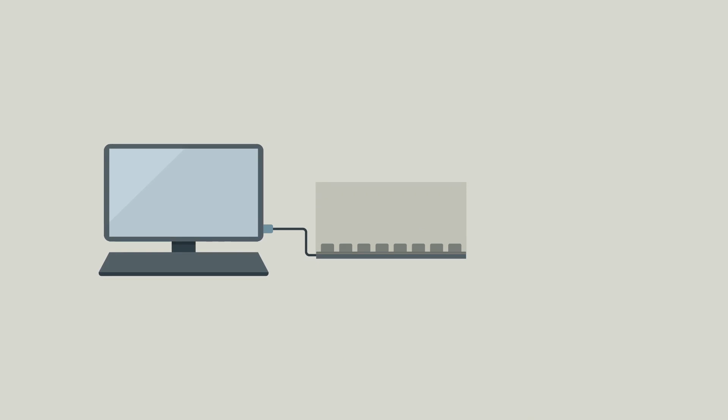Tokens are available in yearly subscription packs that make the add-on products available as a single shareable bundle. Tokens can be checked in and out to allow for maximum flexibility. Each add-on product consumes a defined number of tokens when in use. The total number of applications and which specific applications that can be checked out is limited by the number of tokens users have available.

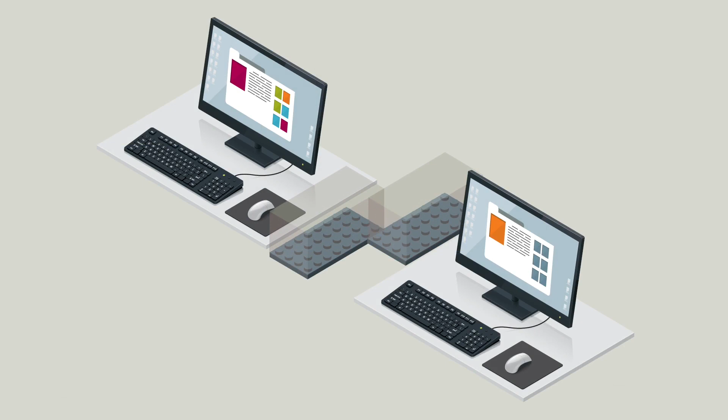Value-based licensing is even more flexible when combining multiple users, each with their own desktop and set of tokens. Just imagine a worker is confronted with the maximum token limit. By having a joint token pool, the limitation is automatically lifted as he or she is able to claim unused tokens from a colleague. In this context, it's also perfectly possible for users to use the same application simultaneously, as long as the token maximum isn't reached.

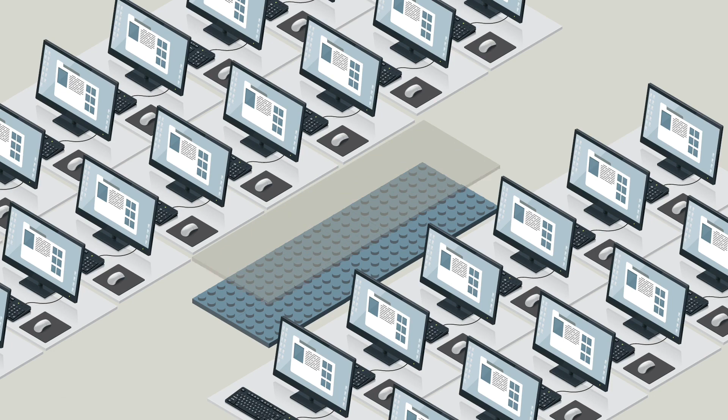Value-based licensing gives you the ability to manage cost, discover new applications, and easily scale your business. In many cases, the total investment is less than individual licenses, yet the flexibility dramatically increases, regardless of whether the modules are used daily or occasionally. Value-based licensing, new for Solid Edge, offers a truly flexible, cost-effective, simple-to-scale approach that reduces risk over time and encourages users to maximally explore new possibilities.

Value-based licensing is only available as part of the Solid Edge SaaS subscription. It provides a cost-effective and flexible method for users to run all these Solid Edge add-on products, and it grants access to multiple products through a system of tokens. Tokens are available in yearly subscription packs of 25 or 50 that make add-on products available as a single shareable bundle. Tokens can be checked in and out to allow for maximum flexibility within your company. Users can mix and match the add-on products as needed within their permitted token allowance. It really is the ultimate in flexibility and will give you access to technologies you never thought possible.

Today, we've shown you some of the great new capabilities within Solid Edge 2023. Companies like Yanu, Harsh, Shankers, Atlantic, and many more trust Solid Edge to help grow their businesses. Isn't it time for you to take a hard look at 2023? Let's create, connect, and collaborate.

And with that, thank you all. We're open for questions, and if there are other questions that you have, we can take some and answer some before we move on. There were some other questions. Obviously, thank you, Aditya. That was a lot of information packed into about 15 minutes. So obviously, thank you, you did a great job. Again, anyone, if you have questions, feel free to ask. And if you need clarifying on anything you've seen today, of course contact us and we'll be more than happy to go into detail. We have very specific training sessions and things that we cover in a lot more detail.

So one of the questions that came in was about the MBD section. Can you use the new MBD features with older version Solid Edge files? Yes, certainly. Solid Edge supports files all the way back to when we started, so you can open any of those files up in Solid Edge 2023 and use MBD tools against them. All the model intelligence we've had forever is available in the files, so our tools will work against them just as well as new models.

The other question that came in was on the simulation capabilities. Are there multi-physics capabilities as well? For instance, can we simulate fluid flow on a defined structure? Yes. Solid Edge has a very popular add-on from Siemens called Simcenter FLOEFD for Solid Edge. It's a full CFD fluid modeling tool. They do PCB modeling, heat transfer, etc. It's a very popular add-on to Solid Edge, built right into the Solid Edge interface, with an excellent integration with Solid Edge, all from Siemens. So you can get it from Saratech. FLOEFD is a great tool to do CFD inside Solid Edge.